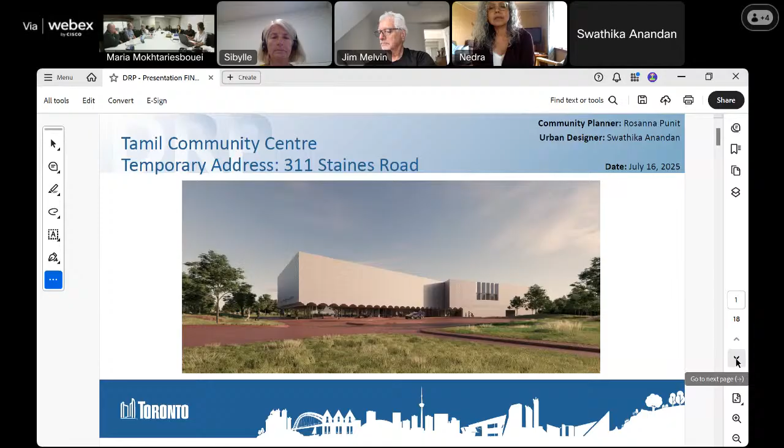I just need to sign in so that I can share my screen, and it's taking a second. Sure. Okay. Let me see the screen. Not yet. We could share this. I should share it with you. Staff presentation. Yes. Well, there's a different one. No. It's okay, I have two, that's one. Okay, go.

Good afternoon, everyone. My name is Rosanna Punit. I am the city planner on the file with my colleague here, Swathika Anandan, who will do another portion of the presentation. So for today, we do have a site plan application in for the Tamil Community Center, currently temporarily addressed as 311 Staines Road. A little context. This is City of Toronto lands. It is being land leased to the TCC, also known as the Tamil Community Center.

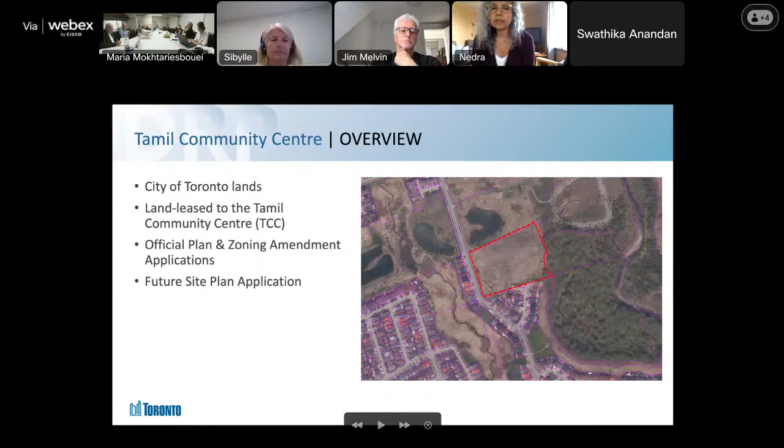Currently, the city is reviewing an official plan amendment and a zoning bylaw amendment. A future site plan application is going to be submitted. The land lease for the subject site began back in October 2020. The city entered into a land lease for this new facility to be constructed by the Tamil Community Center, which is a not-for-profit organization. In addition to that, we are working through the ZBA and OPA at the moment. The proposed Tamil Community Center is open for all communities, all members of the public.

Phase one will consist of a ground floor with a dance studio, gymnasium, kitchen, meeting room, lockers, change room, management offices, multi-purpose room, a courtyard, and a reception area. Level 2 of phase 1 will have a library, kids areas, and a walking track. Phase 2 will be a future auditorium.

Parking for phase 1 will comprise 58 parking spaces, inclusive of 7 accessible spaces. Overall, the site is to have 114 parking spaces. With that said, the application is still under review, and we'll be looking at more details with respect to this. A total of 40 bicycle parking spaces will be provided on site. The frontage on Staines Road is approximately 120 meters.

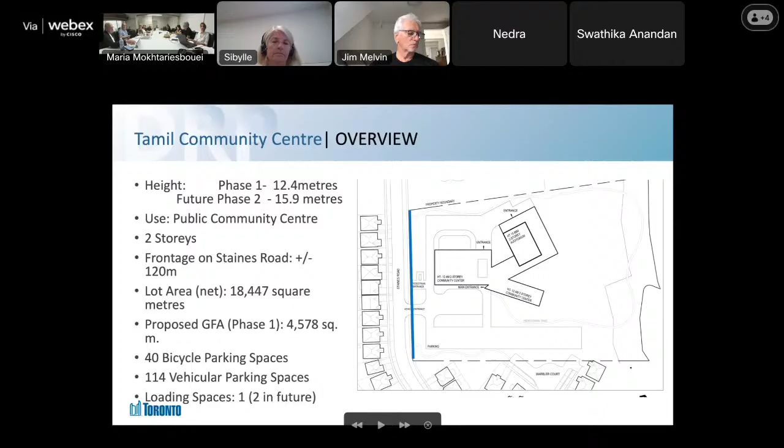In the official plan urban structure, this is located within the urban area. We are working with Rouge Park for potential trail connections to the Rouge that is located to the east. Within the official plan land use map, the site is designated Neighbourhoods.

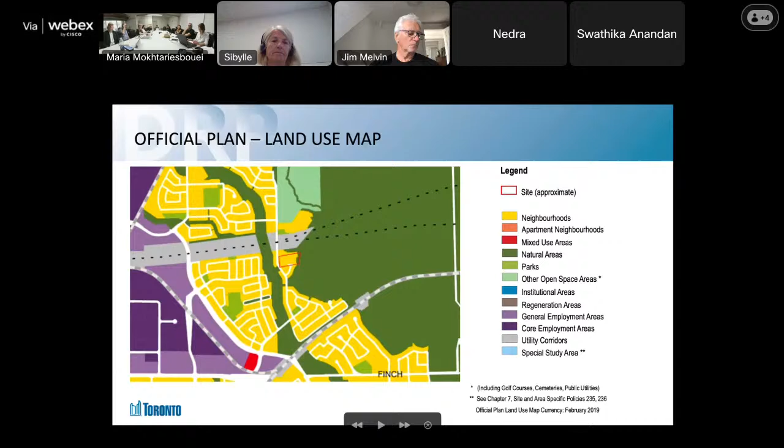The following uses are allowed within this designation: low-rise residential, schools, community center, library, day nursery, senior and nursing home, long-term care facility, public transit facility, and public services facilities provided by a local, provincial, and federal government.

With this, the site is further defined by the Morningside Heights secondary plan. The subject lands are within Area D and Area A Valley. These areas are subject to specific policies. With this, the official plan amendment that is currently going to be under review will further define and delineate the area with the appropriate studies and documentation for staff to review.

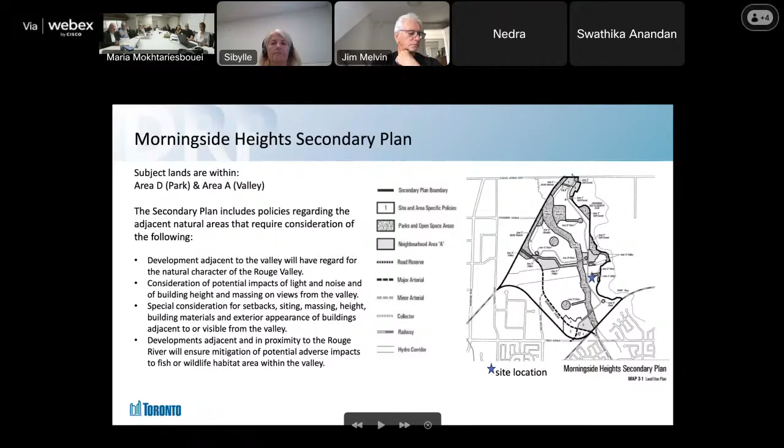Within this area, there are the Morningside Heights design guidelines, and they provide the following principles in brief. They reinforce community identity with design, connectivity, enhancement to natural features, attractive community edges, views and vistas to natural features, as well as some extensive tree planting.

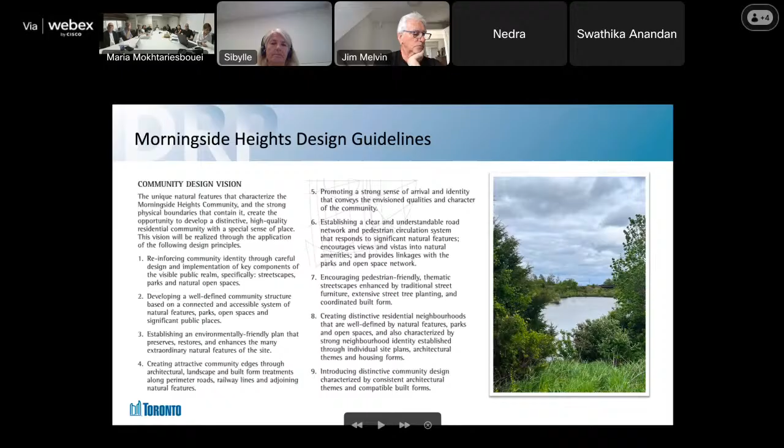The current zoning for the site does have multiple zone areas, the RD and ON. With the zoning amendment application that's in right now, we further define this area along with the OPA. Currently the RD zone, residential detached, permits residential detached dwellings, parks, libraries, day nurseries, and community centers. We will be looking into this further to ensure that the site is up to date with respect to the right zoning permissions.

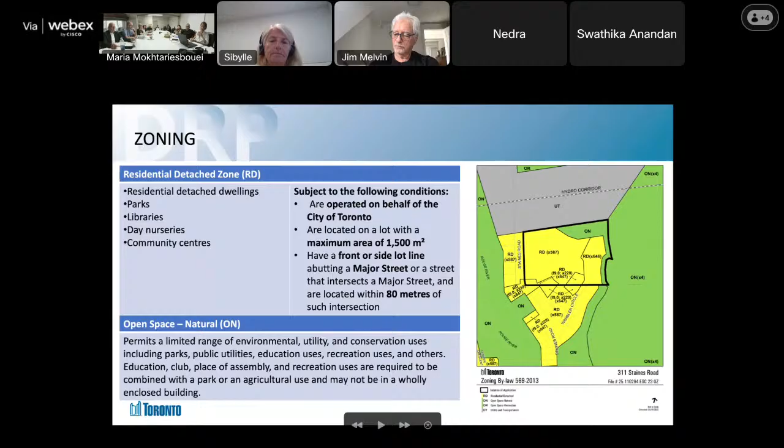I'm Swathika Anandan, I'm the urban designer on this file. I'll take over from Rosanna and go over the aerial view of the existing context of where the site is located. Rosanna and myself are quite familiar with the site as we live nearby and experience the natural beauty that surrounds it. And we wanted to begin by showing you a quick overview that shares that sense of place with you.

The site is uniquely positioned in close proximity to one of Scarborough's most serene pockets, the Rouge National Urban Park. The larger context on the aerial view shows Steeles Avenue to the north, Morningside Avenue that runs southwest, lined by industrial condos, and Old Finch Avenue to the south. The water body that you see is a pond on Staines Road. And here's a fun fact: about 126 species have been spotted, around 70 just this year, according to a local bird watcher website. Next slide, please.

Let's take a closer look at the site itself. It spans about 3-4 acres of vacant land, and the landscape is quite flat and open, with a tree buffer along the Rouge River corridor. To the north, you also see the Hydro Corridor, which is part of the Gatineau Hydro Corridor, and locally it connects many of Scarborough's neighborhoods and acts as a linear greenway.

Immediately to the south and to the west are the single-family detached dwellings, very typical of Northeast Scarborough, with brick facades, driveways, backyards and established tree lines. These neighborhoods are really well established and no high-rise or commercial structures are anywhere in the immediate vicinity.

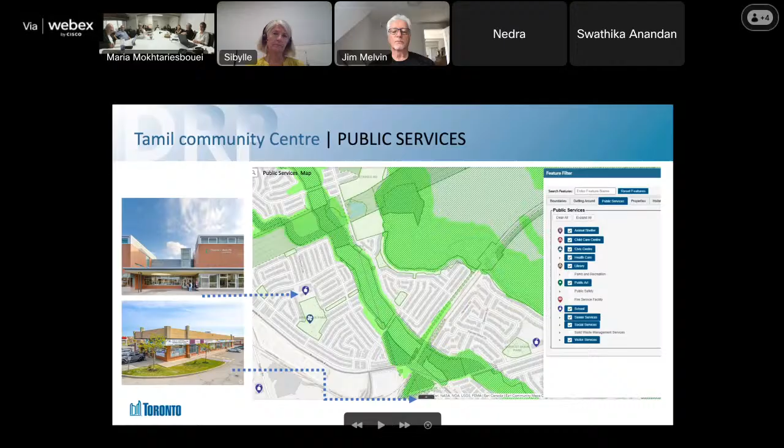While schools and retail services do serve families and working adults, there's a noticeable absence of senior-focused activities in this area. Scarborough's senior population is growing rapidly, especially among immigrants, many of whom face a lot of barriers due to language, mobility, and lack of transportation. Many of them live in multi-generational homes and are dependent on the younger population for recreation as well as engagement. We believe that the community center will fill a crucial gap by its presence, and I will let John speak to the proposal.

Thank you. I'm wondering if Nedra is on the call. She's a representative from the Tamil Community Centre. Thank you. So we're going to move on to the consultant presentation and then come back. Okay. So I'm introducing Nedra Rodrigo, who is a member of the Tamil Community Centre Board. Yeah. It would be good to have the issues of focus first before we go in, so will you show those before? I can bring those back. Yeah, thanks.

So we have two issues for the members. One is that the Public Community Center is adjacent to Rouge Park. Are there any opportunities to look at incorporating natural elements as part of the design? That was one of our questions.

The other one is that the proposed built form aims to reflect Tamil cultural identity in a meaningful yet contemporary way. Do you have any recommendations for how design elements within the public realm might further support this objective, as it's quite nestled away? Okay, thank you so much.

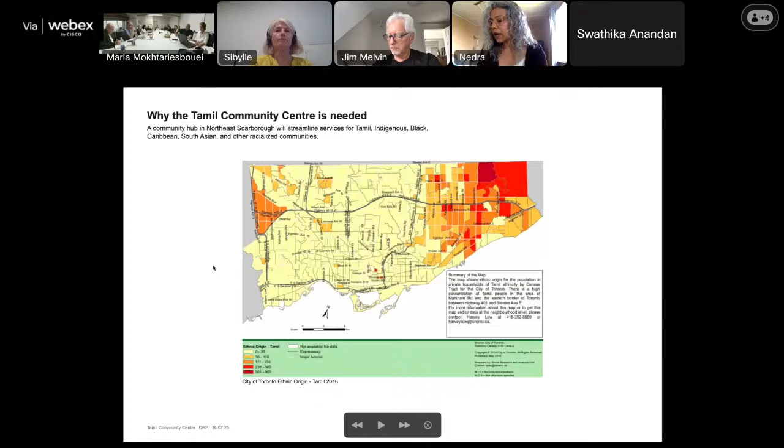The Scarborough-Rouge Park is, of course, the most populated and diverse ward in Toronto. If we think about why this community center is needed, as Rosanna pointed out, it's going into what is currently a socioeconomic dry zone. Residents in Northeast Scarborough and Southeast Markham, especially through the pandemic, faced many challenges accessing vital public services that have led to social exclusion and poor quality of life.

Through our studies, we were able to identify that a large number live in rooming facilities, which makes it harder for the city to gather data on health outcomes and so on. So we wanted to ensure that this project was community-driven and data-driven.

And so we conducted two public consultation phases. The first was with individuals to determine what services should be provided in the Tamil Community Center. As you will see, a large number wanted to prioritize culture and the arts, performances, and so on, but also significant numbers identified streamlining social services and support for women, seniors, LGBTQ+ members, and so on.

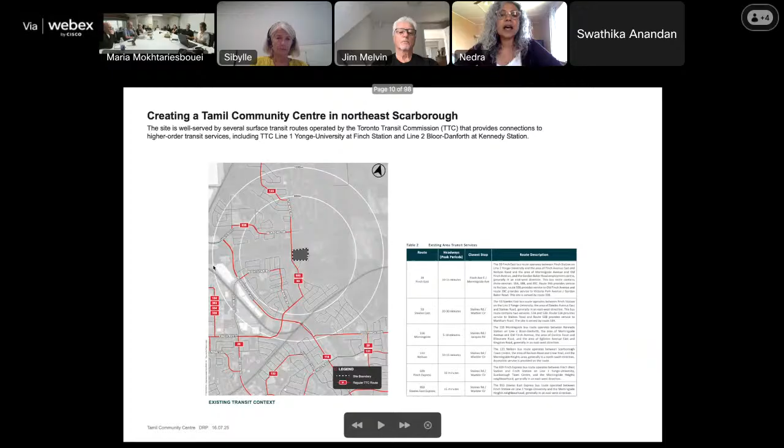The second set of public consultations we conducted were with organizations to determine the frequency and the type of use of the space. So in October 2020, Toronto City Council voted unanimously to support leasing us 311 Staines Road as the future site for the Tamil Community Center.

Whoops, we're going rather fast through these slides. We can backtrack just a little bit. Thank you. And this site fits in perfectly within that socioeconomic dry zone, but at the same time, this densely populated area.

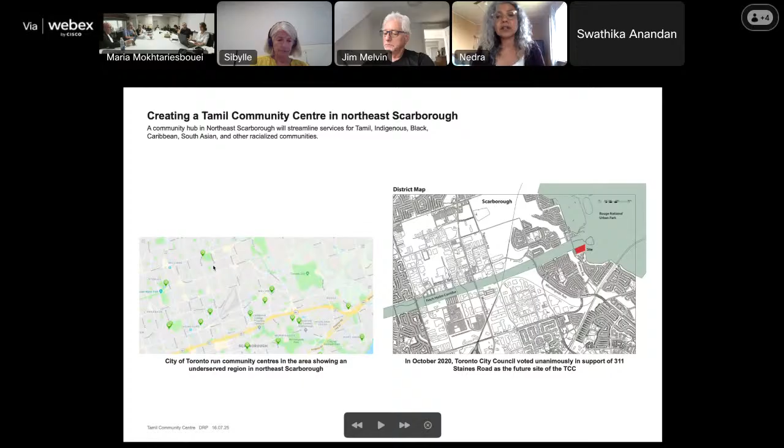In addition, I wanted to point out that this project has received support from all levels of government. In addition to the land lease that the City Council voted unanimously on, we have also received funding support through ICIP from both federal and provincial governments, amounting to 26.3 million.

Nedra? Yes, Dave? Hi, my name's Meg, I'm the chair of the meeting. Just to let you know, we've all reviewed the package before, so we're well on board with it. I just want to make sure we have enough time to review the design, because our purview is really just to review the design, not the project itself, which we think is wonderful. So I want to make sure we have enough time for that at the end, because it's a large package, there's 100 pages.

Did you want me to speak about Indigenous consultations, or are we good there? Nedra, I think I'll take it over from here, and if you could stay on standby to answer any questions that relate to your interest or background in the project, that would be great. Fantastic. Thank you, everyone. Okay, thank you.

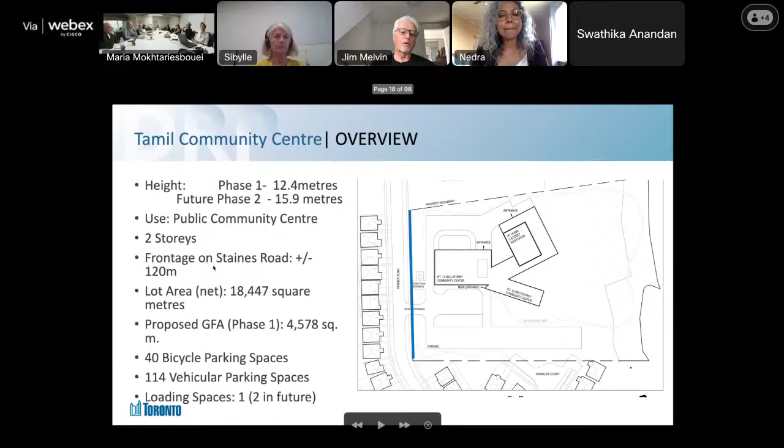My name is John McKenna, I'm an associate principal at GH3. Apologies for the overrun, I hope you can give us a few extra minutes so we can get through the design. I'm joined today by Pat Hansen, principal at GH3, Jeffrey Ma with Renee, our design partners on this project. GH3 are prime consultant but we are very much a design partnership. And Emma West and Sarah Gregory from Bousfields, who've been invaluable supporters as we work through the municipal framework for the project. Excuse me if I run through this quickly, just 15 minutes, I can get through it in 15 minutes.

I also want to say thank you very much for inviting us to present this project. We really believe this is a significant opportunity to bring much needed social, cultural, and recreational services to an underserved part of our city. A really important question for us has been how do we make sure this project is uniquely Tamil without being exclusive. It must remain inclusive to all communities, particularly marginalized and racialized communities who may face the same lack of access to services and space that the Tamil community has.

So we did a lot of research. We looked first at Tamil language. Tamil is the oldest classical language in the world, with a strong literary tradition of over 2,000 years, still spoken by millions of people today. It's really remarkable, and it's also objectively, visually, a really arresting script. So we're working to incorporate Tamil language into the project in a very meaningful way.

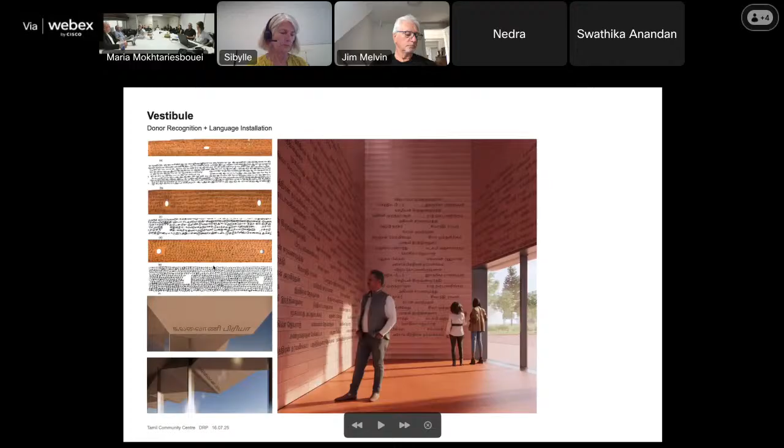For example, when you enter the building, there is an immersive donor atrium that includes the names of all the families who've helped financially to make this project happen.

Dance and music are really core to Tamil identity. We had the privilege of attending an Arangetram, a community coming-of-age dance performance. This project has a large auditorium seating about 450 people, which will be used predominantly for Tamil community performances, designed to focus on dance as the main type of performance.

We've been really compelled by Tamil fabrics, silk saris, the intricate border of those fabrics and the pleating, which has begun to inform an idea about how we can break down the mass of some of the large volumes we're dealing with in this building type. And the kolam is a fascinating floor art that represents the geometric and mathematical precision inherent in many aspects of Tamil culture.

We're steering clear of religious and temple architecture as a reference—amazing structures in their own right, but this is a secular project. So we're more drawn to rupestral architecture, the strong carving of stone. These are structures found in Tamil Nadu and Sri Lanka that provide refuge, sometimes along journey routes. We're struck by the strong, solid void carving these structures evoke and the shelter they give to people, and they're beginning to inform our ideas about form making, facade making, and creating shelter.

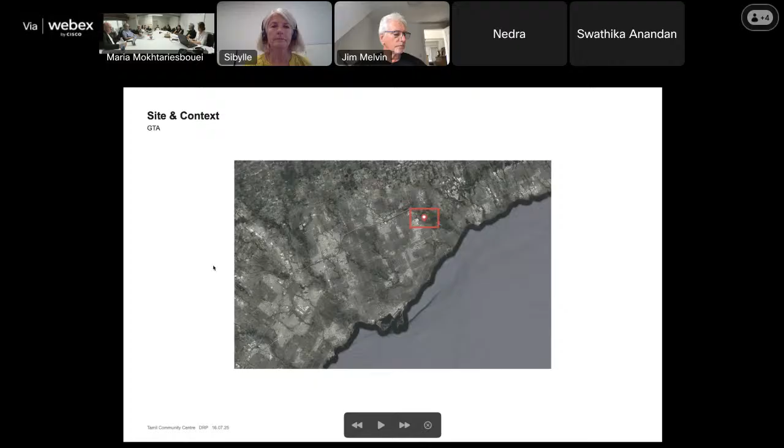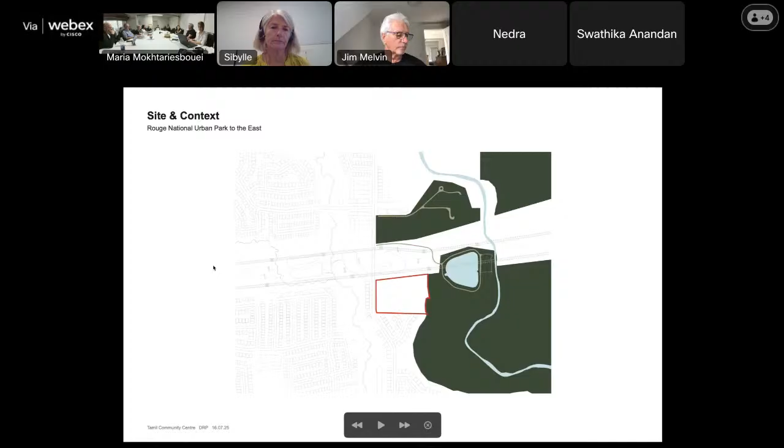I'm going to skip through this, I think everybody knows where the site is at this point. We're in Northeast Scarborough, between Staines Road and the Rouge. We are blessed with this direct proximity to the Rouge Park. It also brings with it an added responsibility for natural heritage conservation on the site. We are also neighbor to single-family detached residential neighborhoods to the west, the north, and the south.

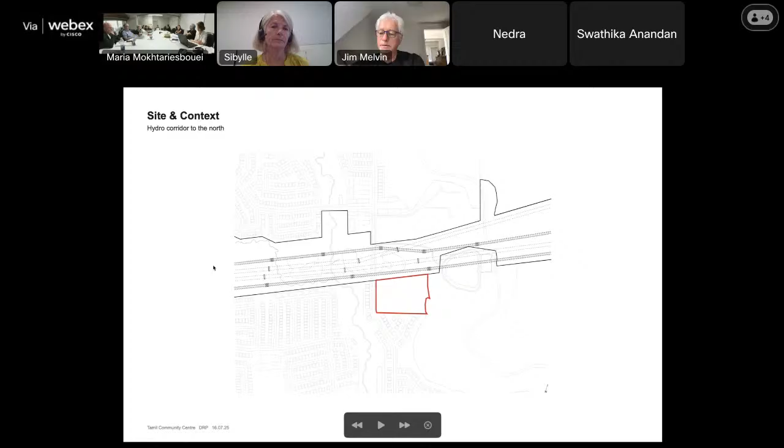A really interesting condition at the north is the hydro corridor. Depending which way you look at it, it can be seen as something not attractive to us, but it is a really great opportunity for the project. It means we have space and long views in perpetuity, which in a densifying city like ours is not something to be taken for granted.

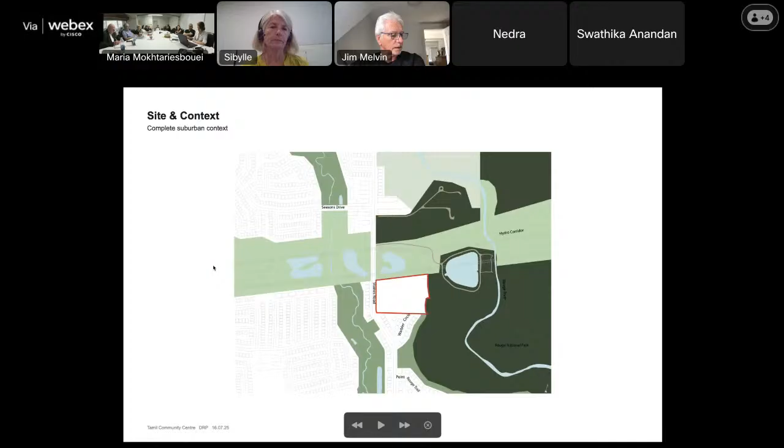We are also neighbor to a really rich network of existing green spaces that are close to the site and abut the site on some sides. And when you bring the understanding of the Rouge back into the site, we're really kind of a bridging piece between a lot of really valuable pre-existing communities that we have the benefit of engaging with.

How do you put a building on this site has been a question for us, but we don't have a lot of the formal urban design cues to build on as we might have on a more densely developed site. Early thinking and discussion with the city was to do something conventional around creating a traditional street edge by aligning the length of the building to Staines Road. Our instinct is not to do that.

We feel like we want to rotate the building east-west because we think it's really important to preserve these long views across the site that the neighbors to our west have enjoyed, and also that we think it brings the experience of the Rouge close to the city as you traverse this part of Staines Road.

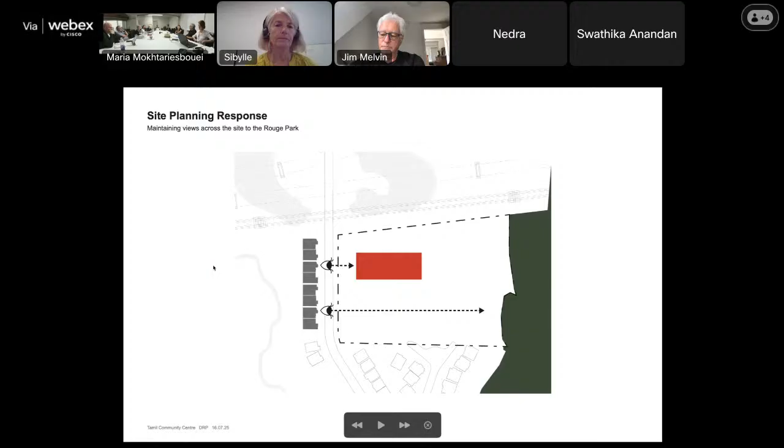If we increase the real estate we have at the east side of the building and then begin to cut into it and form it to maximize that aspect of the project, still respecting a shorter elevation along Staines Road, we think we can maximize the benefit of the east side of the site and respect the condition on the west side. So the building navigates these two very different conditions.

It also allows us to form the building in a way that intuitively can be phased. We had to recalibrate the program with budget realities when we took the project over in 2022, and it looks at the moment like we will have to phase the auditorium and one of the dance studios to a later date.

One of the other benefits of this approach is that we can intuitively locate different program types into each wing, and then the culmination of those 3 major program types—the dance and music, the literary, commemorative and exhibition, and the sports and recreation—all galvanize in the central courtyard, which is the space that welcomes everyone into the building.

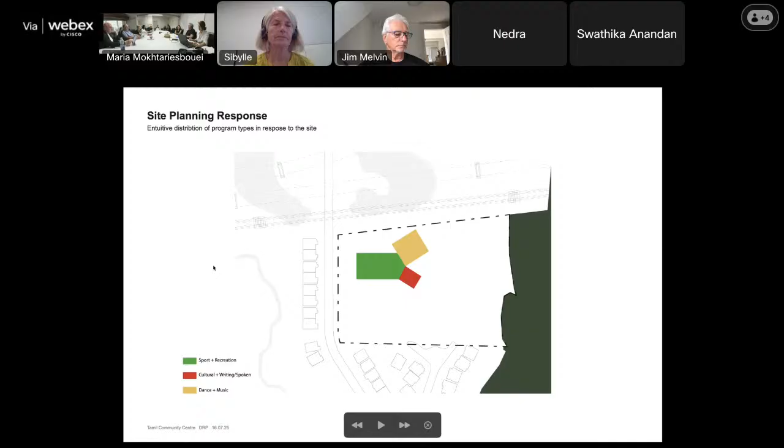We're trying to limit hardscape on the site, so we do that to the west, and then allow the east portion of the site as much as possible to be softscape and naturalized. We also are going to maintain an existing depression at the level of the site relative to Staines Road to allow a building which has some quite tall volumes in it to feel as nestled as possible.

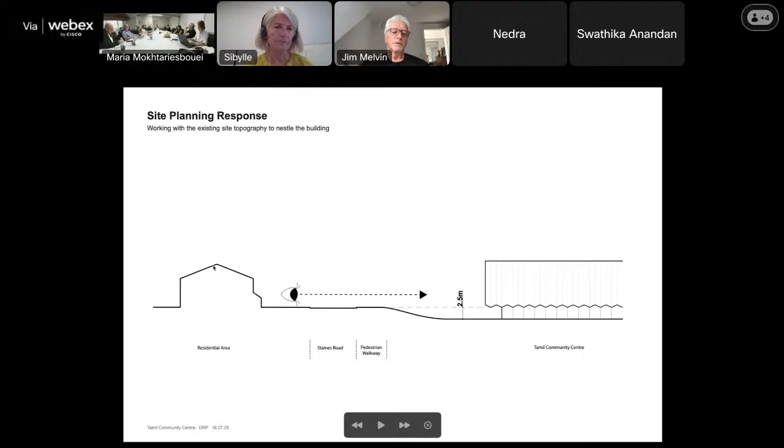We want to respect the datum of the tree canopy of the Rouge, but also the ridge height of the houses as much as possible, so that this building feels comfortable navigating those conditions.

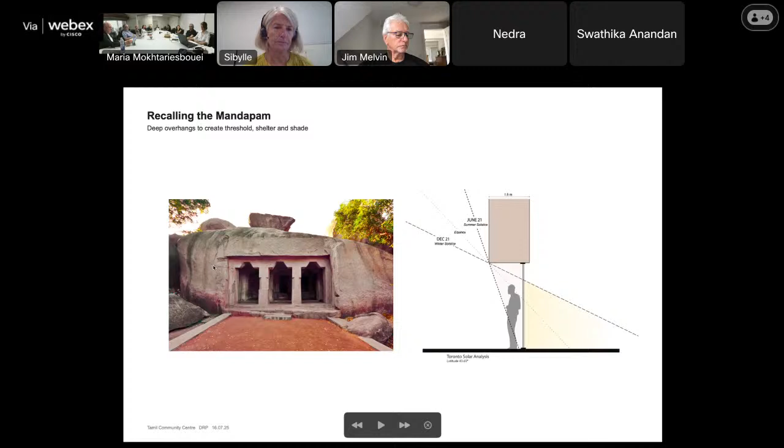As I mentioned earlier, we're trying to find an appropriate level of interpretation of Tamil references. We think the shade and refuge of these structures is interesting as a way to start creating architecture that has deep overhangs to reduce solar heat gain in some of these large spaces that want to be glazed. There's an interesting heritage link between Tamil Nadu and Sri Lanka, where there is this rich history of using brick, as we have here in Toronto.

We also think that the carving of some of the stone elements is a way for us to start to break down the massiveness of some of the large surfaces that these building types typically have. We're using brick as the predominant cladding material on the project.

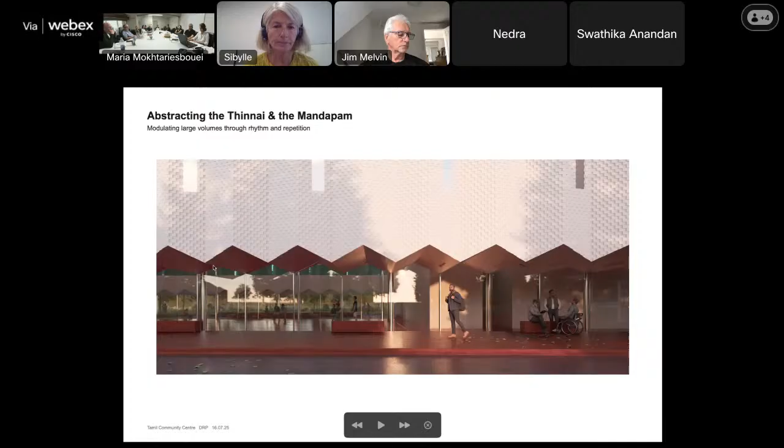A glimpse of how these different moves come together to create an architecture that we think is specific but also functional. You're all probably familiar with the site plan at this point through the diagramming.

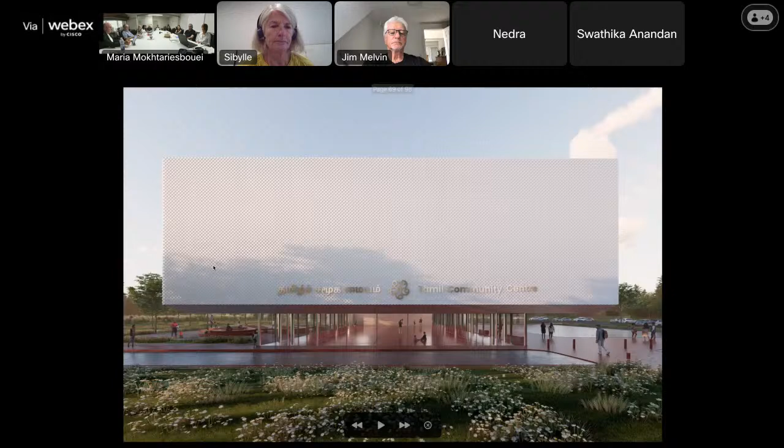We want to make sure that the more conventional space of the program, the gymnasium, is to the west, to Staines Road, so that it really activates that part of the site and people passing by can see the activity in the building. That space also opens out to other landscaped areas to the south and north that can be programmed during summer months for fairs, playgrounds, and things like that.

The ground floor of the gymnasium opens up completely through glazing and acts as a beacon to draw people in. The main pedestrian access route also passes by the length of that space, so people coming to the building for the first time really get a sense of the life of the building within.

We have other site amenities such as a recreation sports field. It's just a mown patch of grass, really, without a great amount of infrastructure to the east, again respecting the character of the Rouge.

A sculpture courtyard is nestled between the two wings to the north, and a planted garden comes into that cleft between the two wings to the east, drawing the greenness and character of the Rouge as deep into the plan as possible.

An image here shows how the drop-off plaza might be shut down in the summer at times for community events and fairs, as a generously proportioned plaza that can be programmed by the community as they see fit.

Parking is always a challenge, and we really wanted to avoid having a sea of it between the street and the building. Our strategy is to take advantage of the level difference on the site and nestle a band of parking along the south of the site that sits about 2 meters lower than the grade of the houses directly to the south. We think it's as discreet a position for the parking as we can get on the site.

We also have additional overflow parking at the north, which would be used predominantly for events in the auditorium. We also have a clear servicing strategy.

We had initially requested 2 curb cuts from the city. This wasn't feasible, so instead there's a clear split of service, delivery, and garbage vehicles from public vehicles once you enter the main entrance of the site.

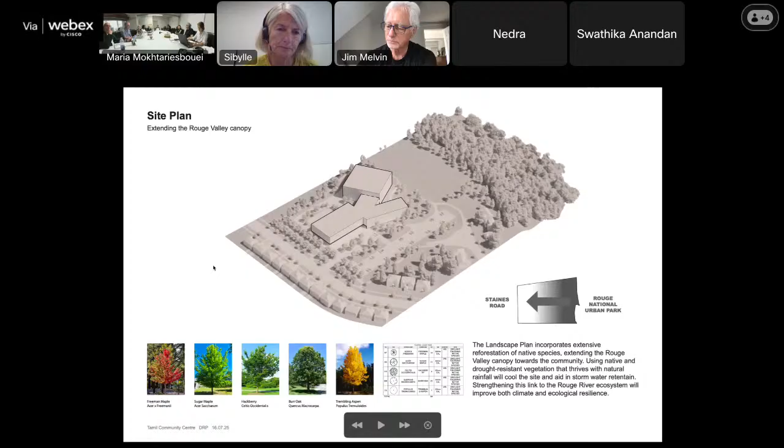This has also been given approval by the various Indigenous groups that have long been engaged in this project, who support the idea of planting as many trees as possible on the site. There will also be spaces within the landscape for commemorative Indigenous artwork that will be developed in tandem with some Tamil artists.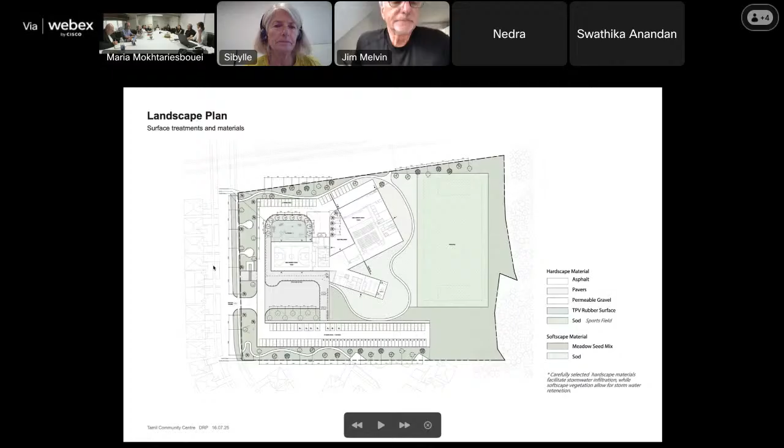This site plan is somewhat outdated—the sports field was previously partially within the 30-meter setback zone. We've had very clear feedback from the city and the TRCA that this is not acceptable, so the most recent site plans shift the sports field and reduce its size. It's no longer regulation size, but the client is willing to make that sacrifice to engage positively with the conservation authorities.

In terms of sustainability, we have a limited budget on this project. It's been challenging, but we're doing our very best to target net zero carbon and LEED Silver certification, predominantly through judicious positioning and sizing of openings, deep overhangs, and a very high performing envelope. We're going to push for as much rooftop PV as possible.

But I think the thing we think is really important is resilience. Like the refuge structures in Tamil Nadu and Sri Lanka, this building should be a refuge for the community, for people who may not have air conditioning or HVAC that can deal with the smoke we're witnessing these days. So we're pushing hard for increased performance and redundancy in the systems that will keep this building a safe space for the community throughout the year.

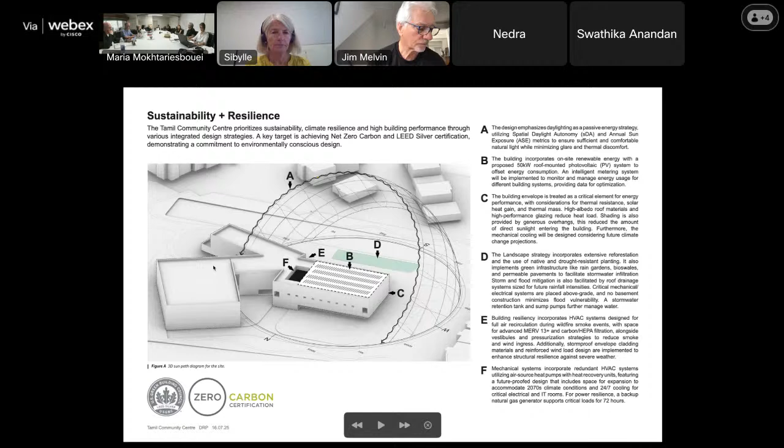I'm going to be done in a minute. No.

I'm going to finish by talking about the courtyard because it is the center of the project. The other three program areas move around it and form it. It is the space that people enter into, with an indoor and an outdoor component—a loose contemporary interpretation of a courtyard proper, but it's the heart of the building.

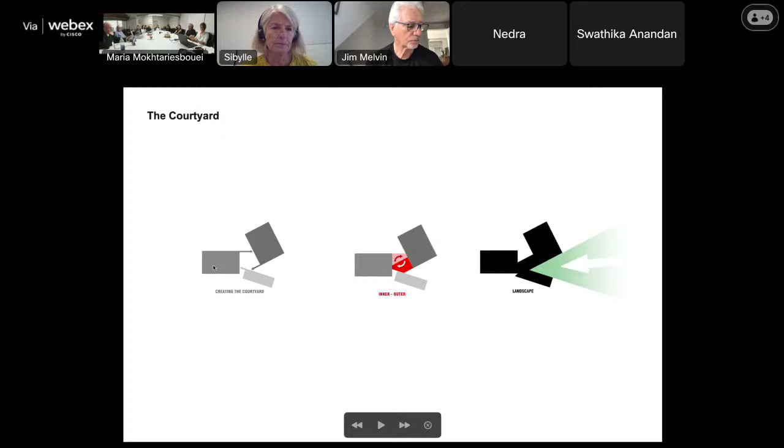It's also engaging with the Rouge strongly as we create this gap in the plan to pull that into the building. It's important for us that it's a dynamic contemporary space, but that you always get glimpses of the landscape around—views up, views down, views through and across and between wings of the building. We think it should be a really dynamic experience.

We really try to bring through large glazing on the east of this part of the building the experience of the Rouge deep into the plan.

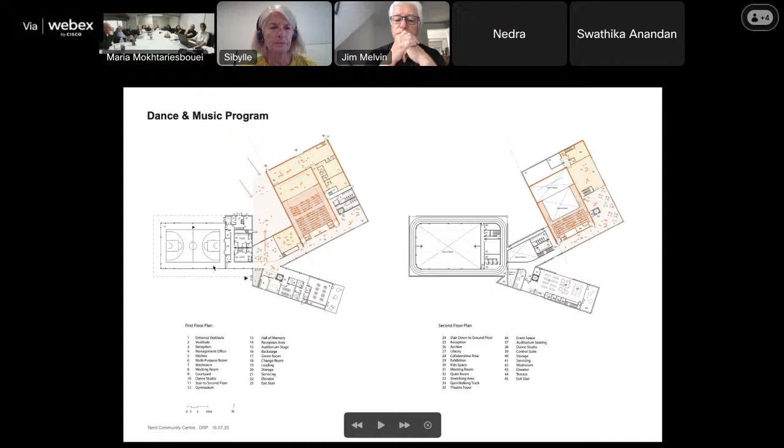I don't need to go through this in too much detail, but this is how the plan is organized around the courtyard and then each block.

The auditorium is a really important space. It'll be used weekly for Tamil performances. It currently has about 425 seats.

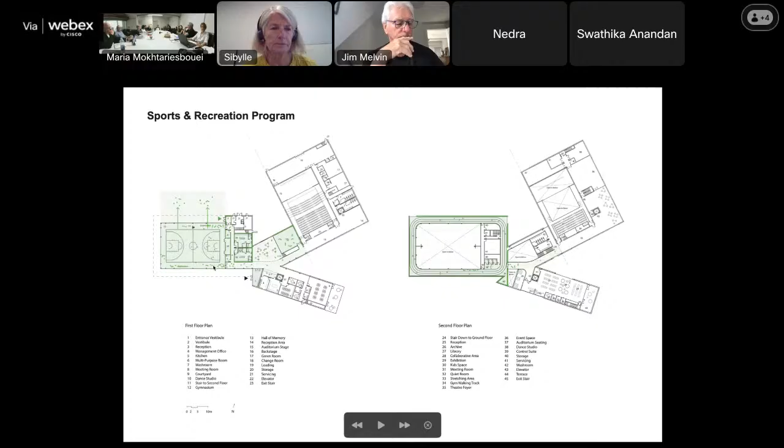The gymnasium is also, we think, a really important dual-use space. It has uninterrupted views of the surrounding neighborhood on the ground floor, deep overhangs to keep it cool and protected from the hot summer weather, and a perimeter walking track on the second level that we think could make it useful as an impromptu performance space before the phase 2 auditorium comes in.

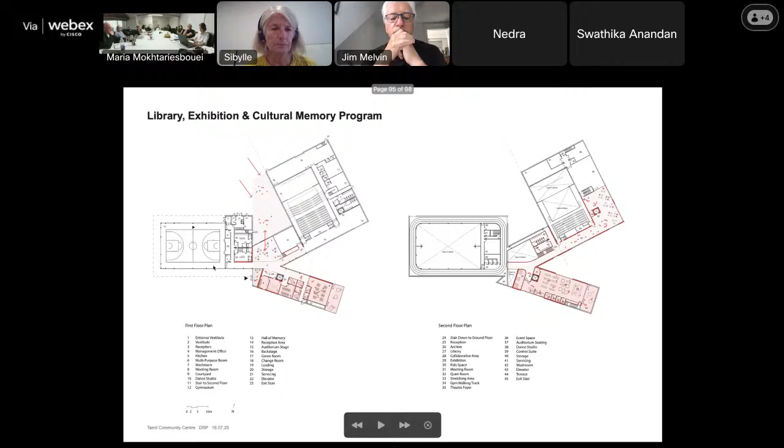Finally, a really important part of this project is the library exhibition reading room space—a quieter, contemplative space with strong views out to the east to the Rouge, and a balcony facing the Rouge for events.

And finally, what we hope the building will feel like in place in the winter months, which we know are a longer portion of the year every year. So that concludes my presentation.

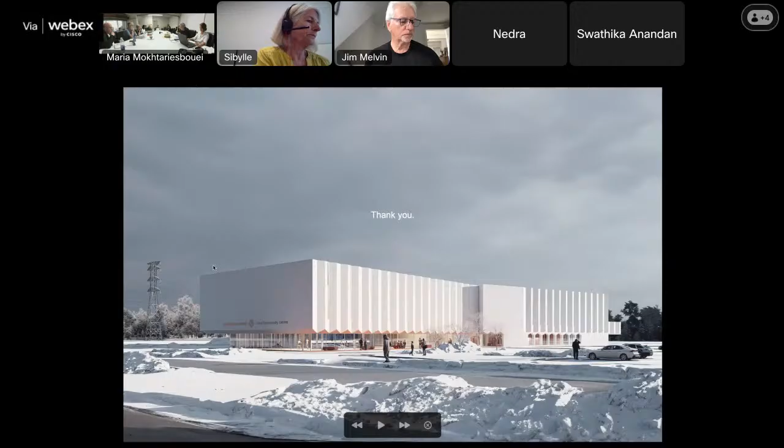Thank you. Okay, we are now going to move into questions from the panel, questions of clarification. We're going to take virtual and real hands. I'm looking first to Jim and Sibylle to see if they have any questions. Seeing none—okay, so we'll do Michael, Olivia, Jessica, Rob, then Judy, then Jim, and then Sibylle. You'll have something at the end. So Michael, let's start with you.

Question of clarification for the city. To the north is the Hydro Greenway, really important metropolitan scale infrastructure in the city. Does it have any recommendations or guidelines about its edges and integration with adjacent properties such as this?

Pathways through, are there any controls on extending paths or other activities on that space? Right now, the gradations and the topography do not allow for that. And if you could switch to one of the slides which shows the ponds in the hydro corridor, that limits the activity of such linear greenways, especially closer to the community center and across on both sides of Staines Road.

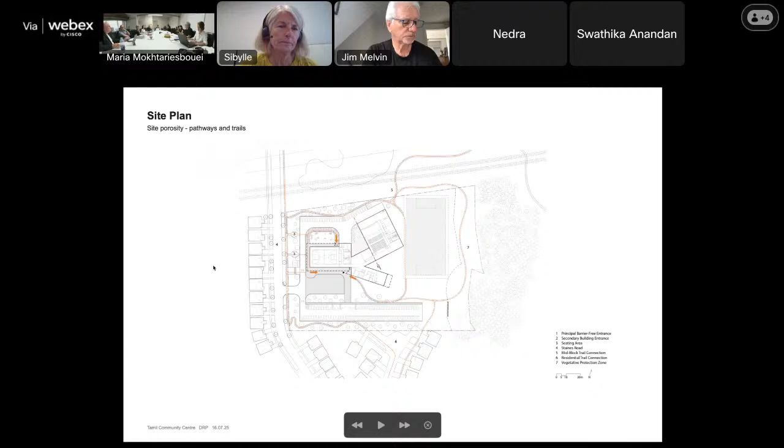Whereas there are stretches such as the Meadoway closer to Morningside or closer to McCowan, there you have more of an organized multi-use trail path which has been formulated, but not in this. So this is more like wilderness.

Okay, thank you. Let's just actually go around the table. Okay. Yeah. Great, thank you, Madam Chair.

Given that the building is about 2.5 meters below street level, I'm curious how wheelchair users are going to get from the street to the building. I didn't see a ramp in the drawing. Where we have the main pedestrian steps coming down, there is a dog-leg ramp that starts at the top of the stairs and discharges you at the same point as the bottom of the stairs. It goes parallel to Staines and then turns on itself to bring you back down. I should clarify that at that point of the site, the grade level difference is about 1.5 meters between street level and the main floor level of the building.

Okay, great. One more. I'm curious about why you need the overflow parking. Staines Road is currently totally empty from every photo I've seen online, so why can't you just use the street? We really don't want people to park on the street. It's very important. And in fact, there is a future road widening theoretically proposed for Staines Road. It's really important to us and to the Tamil Community Centre Board that we can accommodate all parking demand on the site. Understanding that at times there may be increased demand for performances in the auditorium, we think it's important to have this additional parking overflow space.

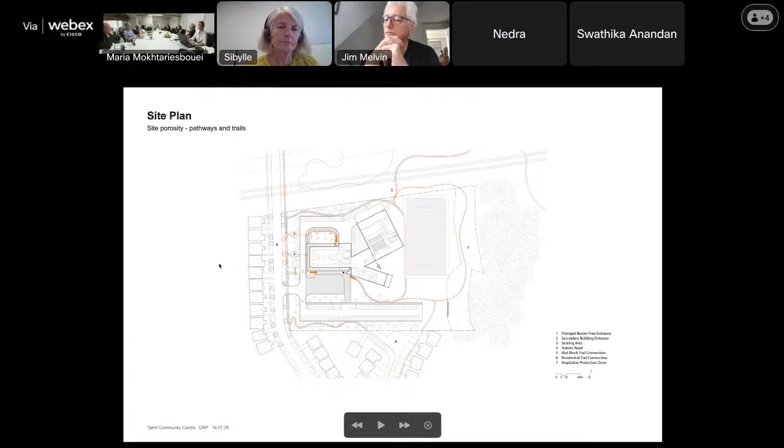That's good. Thank you. You've chosen to show some interesting materials for the paved areas in the renderings, and I was just wondering, often they're quite dark. Can you explain if there was any significance to those or what the design intention was behind them, if any? Yeah, it's a good question.

We will be having a concrete floor in the interior of the building, and we're looking at having a dyed red concrete. We would like the exterior hardscape areas around the building to feel like an extension of that floor, so that there's continuity of inner and outer spaces. So right now we're looking at colored precast pavers. We're actually looking at some dyed asphalt materials.

It's early days, but I think to us there is an effort to unify the ground surfaces inside and outside the building. We're also looking at colored rubber surfaces in the playground directly to the north of the gymnasium, which would feel like an extension of the gymnasium floor as well.

And then, sorry, I just had one other quick one. The seating areas along the streetscape, are they on the upper level or the lower level? They're on the upper level so that they're directly accessible from the municipal pavement boulevard. And we think they are good sites for public art, so that people who might not make their way fully into the site can engage with the spirit of what's happening on site.